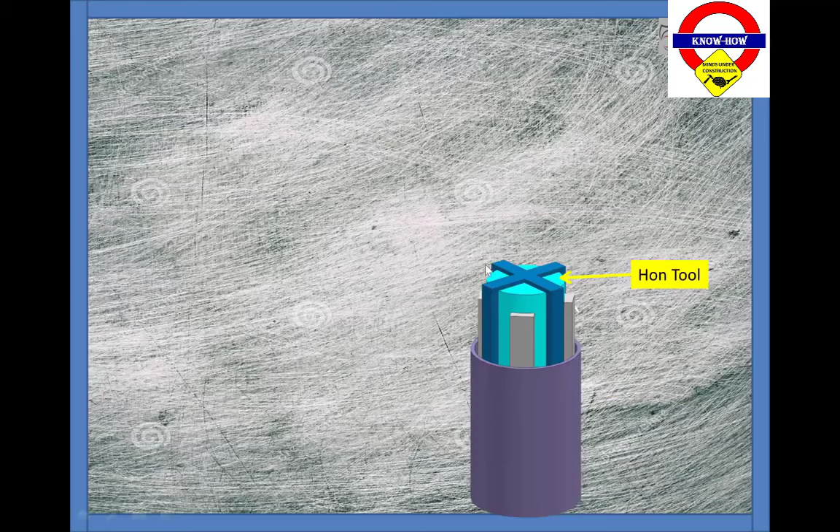Before we see the actual process, we should get an idea about the components required in the honing process. First, the honing tool. This complete assembly is called the honing tool, which contains the hones or honing stones and the guides. Now we'll see what is meant by the hones or honing stones.

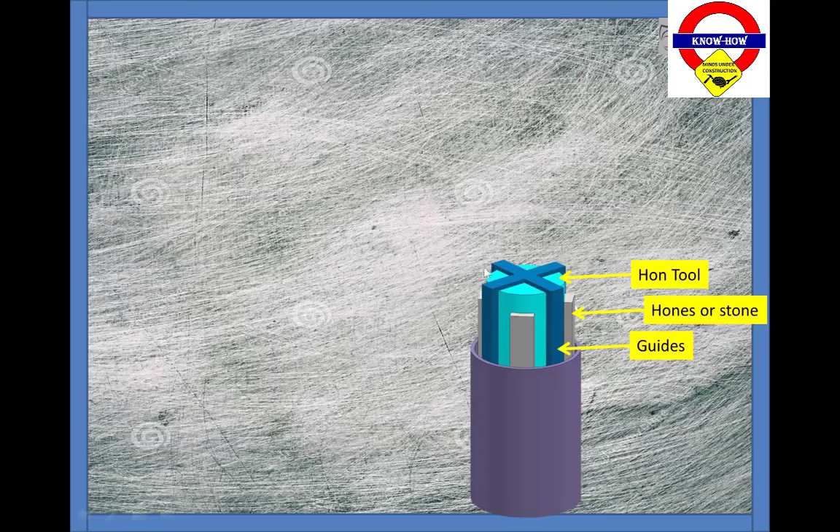One more thing before that - this is just one type of tool I have shown. Mostly this type of tool is only available in the books, but nowadays in the market plenty of different types of tools are available. If you want to see different types of tools available in the market, just visit any e-commerce site like Alibaba or eBay. You will get plenty of different types of tools, and then you will get an idea about the honing process also.

So now we'll discuss the hones or honing stones. Usually honing stones are made up of common abrasive and bonding material, like in a grinding wheel. Because of the bonded abrasive, this process is similar to the grinding operation. That's why it can remove as much as 3 mm of stock, but normally it is limited to 0.5 mm only, because we are going to use this process to finish round holes only.

Just now I said this process is similar to grinding, but there is much difference between grinding and honing. The first difference is that in grinding the wheel follows a simple path - for example, in plunge grinding a shaft, the wheel moves towards the axis of the part and then moves back out. If there is any inaccuracy in the grinding wheel itself, it has to get replicated or transferred to the part being machined. That means the accuracy of the part depends on how accurate your grinding wheel is.

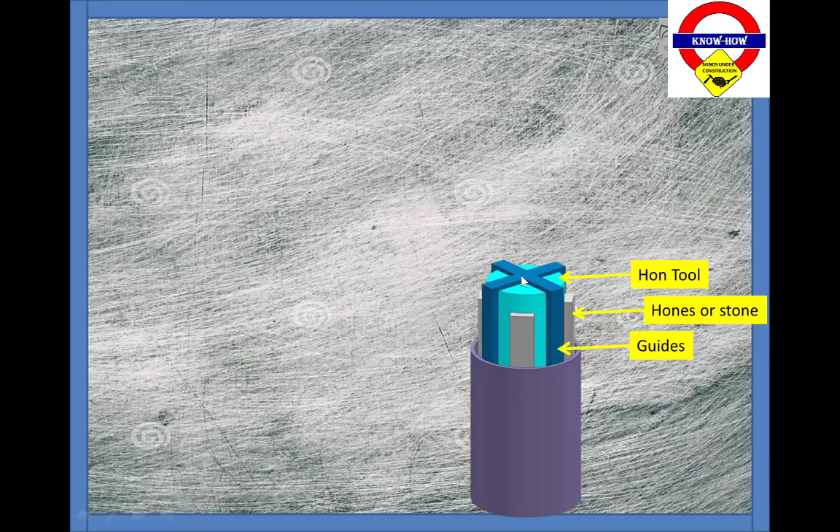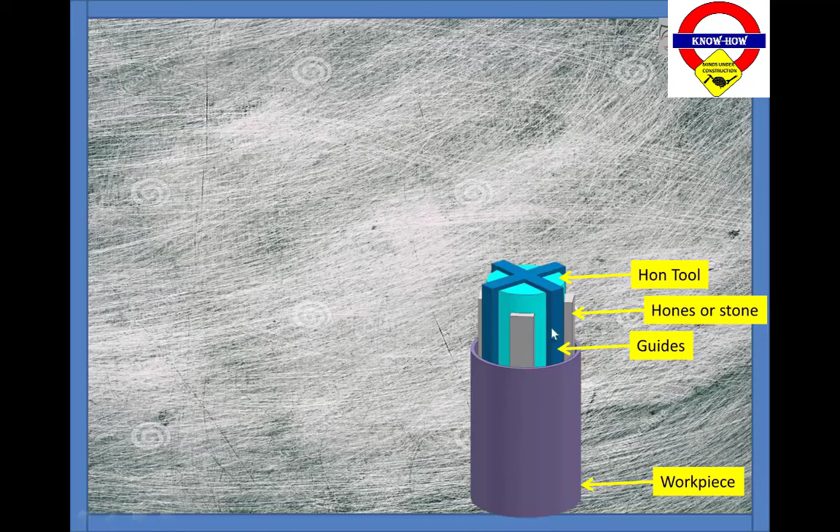The next component is the workpiece. The workpiece shown here is a cylinder - you can consider this as a cylinder block of an internal combustion engine, and we are going to finish that. So from this explanation you can define honing in one sentence: honing is a grinding or abrading process mostly used for finishing round holes. This is the one-sentence definition of the process.

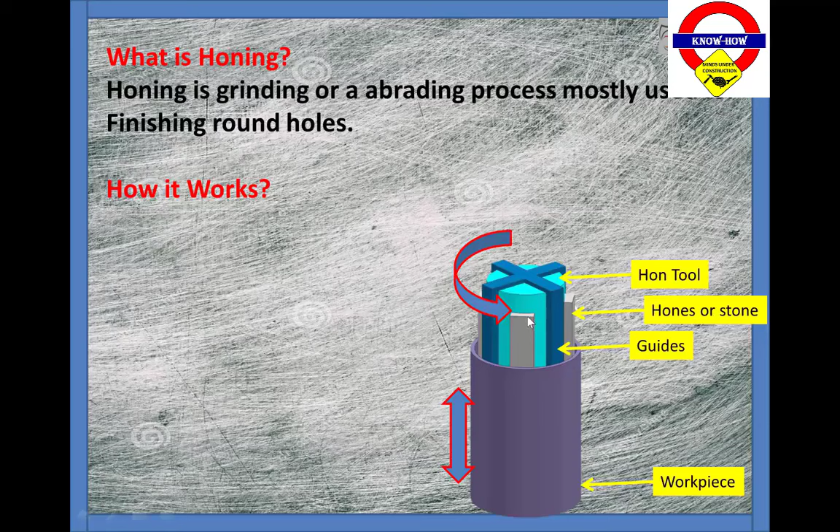Then, how does it work? This means what motions are given during honing. In this video, I have shown the same tool model to help you understand the concept of honing. From this you may understand that in honing you can give any direction to your tool or workpiece - that means you can give a back and forth motion to the workpiece, or rotation motion to the tool or workpiece, anything. But when performing honing manually, the tool is rotated.

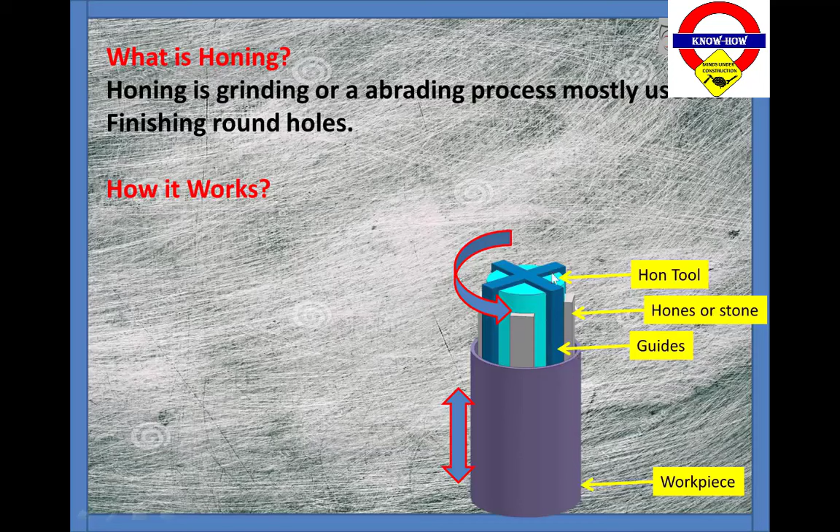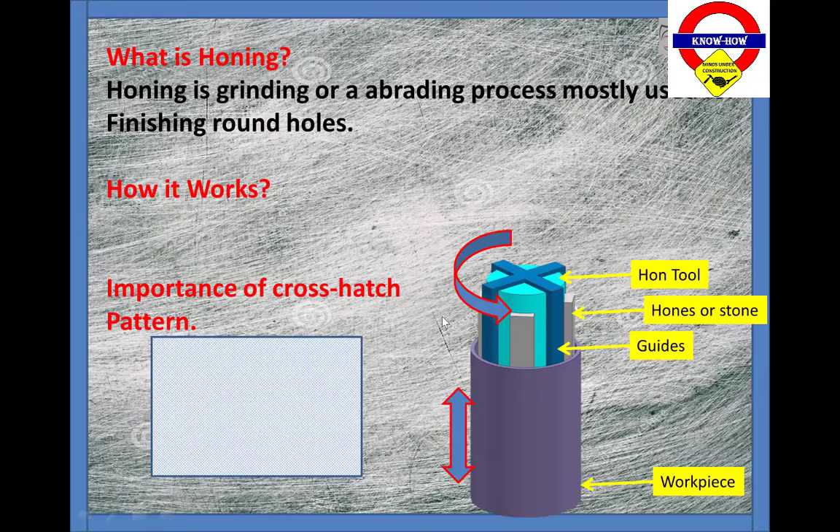That's why I mentioned rotating tool with back and forth motion given to the workpiece. One more point, if you want precise honing, then while rotating the tool it should have slow back and forth motion so that we generate the cross hatch pattern on the workpiece. The importance of that cross hatch pattern on the mating or sliding surface is that it can hold the lubricating oil, giving smooth motion and avoiding wear and tear, so ultimately the life of the component increases.

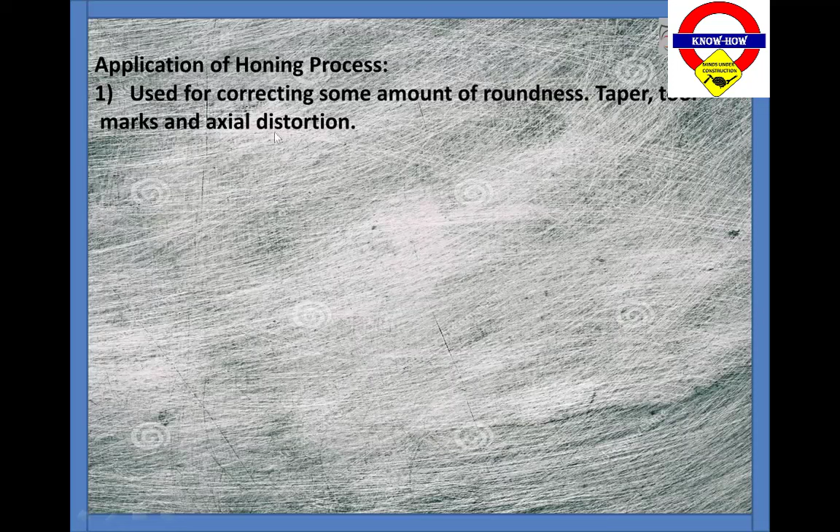Next, what are the applications of honing process? As I said, we use this process to finish round holes - finishing in the sense correcting roundness, taper, tool marks or any axial distortion. I hope you understand the concept of roundness and axial distortion here; if not, please Google it.

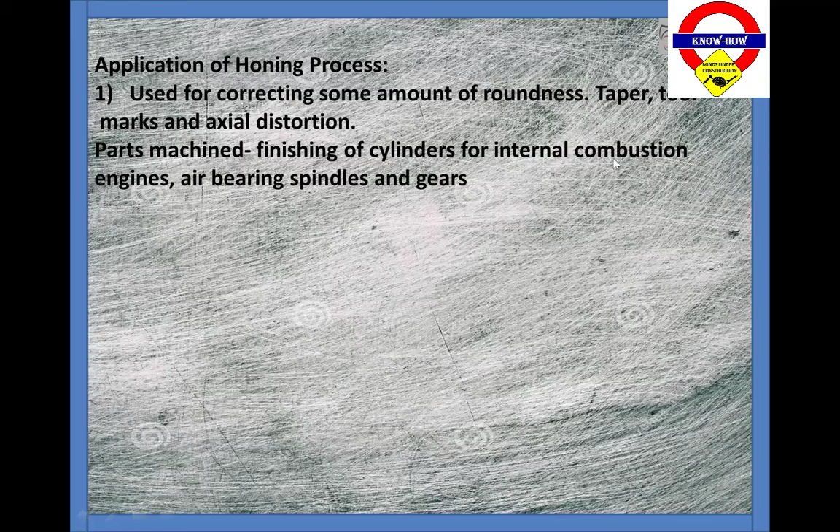What are the common parts machined by honing process? You can see cylinders for internal combustion engines, air bearing spindles and gears. These are the common examples of honing process.

Next, materials to be honed. First question that comes to mind - is there any limitation on materials to be honed? No, absolutely not. You can machine a very soft material to a very hard material like plastic, silver, aluminum, brass, cast iron, hard steel or cemented carbide also.

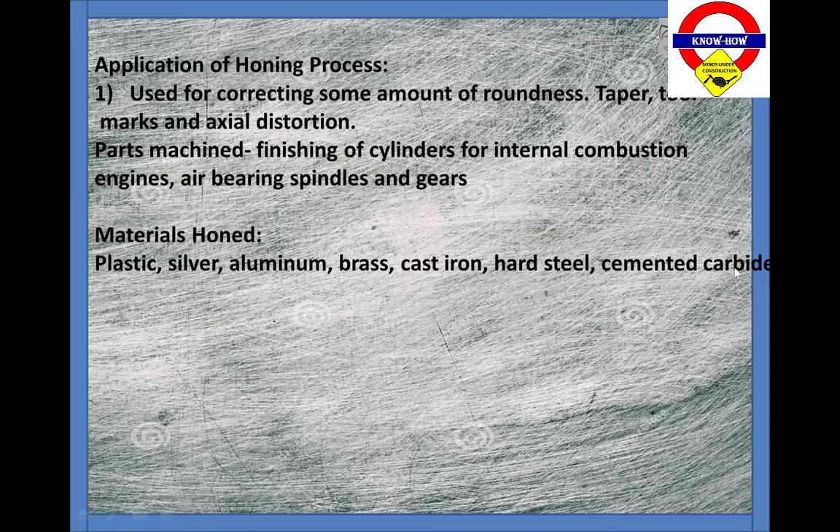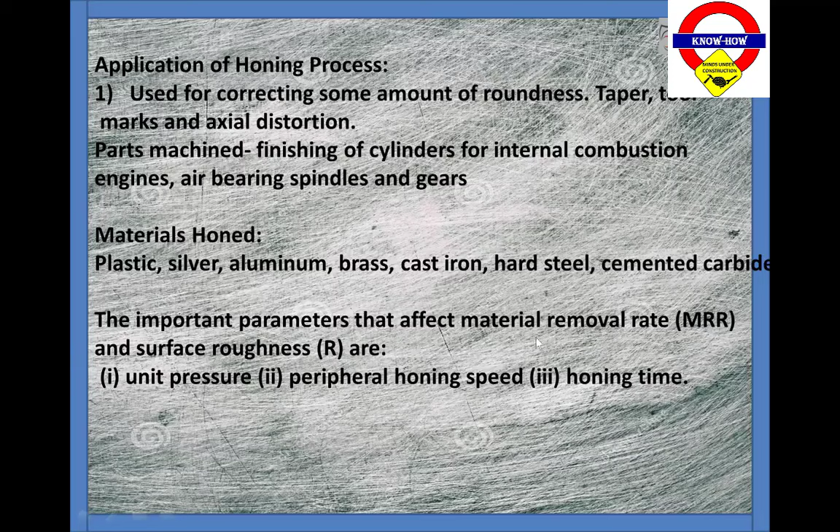Next question - what are the important parameters that affect the material removal rate and surface roughness? As I told, we are pushing the hone stones outward radially. That means the first important process parameter is unit pressure. Then honing speed, that is surface speed or peripheral honing speed. Third is the honing time, how long you perform it. On all these three parameters depends your material removal rate and the surface roughness produced on the part.

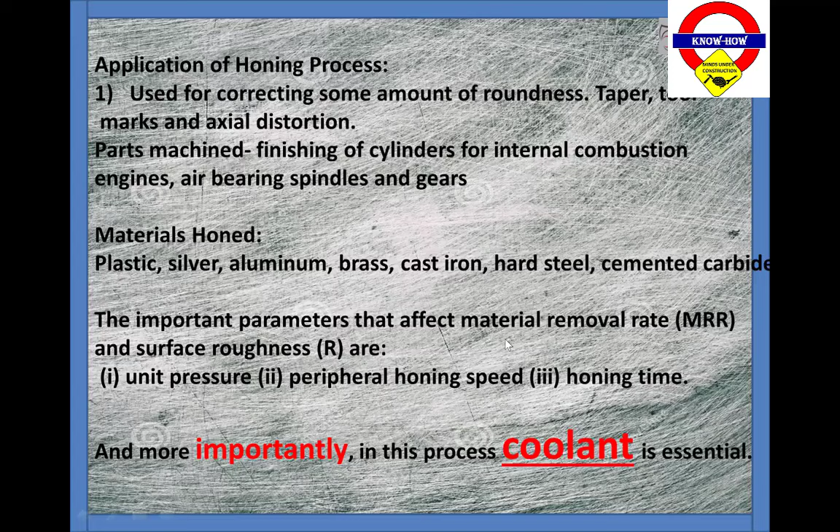More importantly, in this process coolant is required. Why so? As I told you, this process is like a grinding process, a type of grinding process only. So it generates heat and burrs. To remove that generated heat and burrs, we need to provide coolant in the machining zone. This is the most essential point in the honing process.

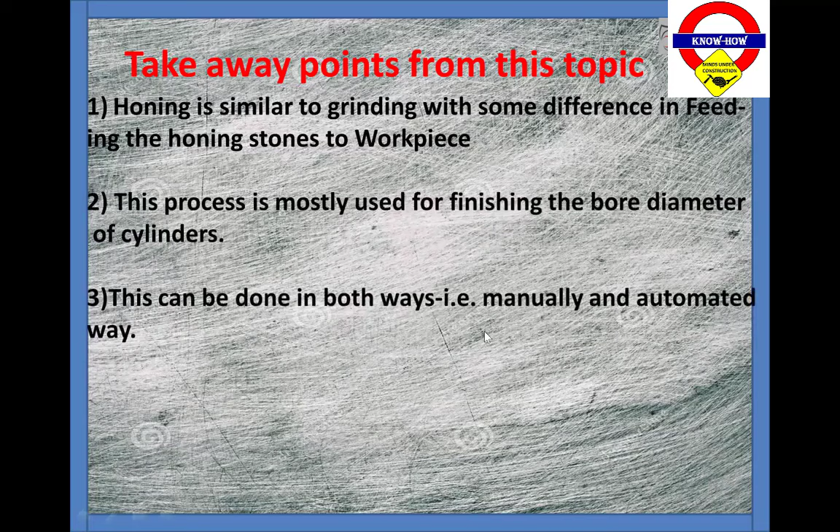That's it guys from this topic. These are some points I have summarized here. You can note it down so you will not forget the honing process. I will read it for you one more time. Takeaway points: first, honing is similar to grinding with some difference in feeding the honing stones to the workpiece.

Second, this process is mostly used for finishing the bore diameter of cylinders - finishing in the sense of all those points just discussed. Third, this can be done in both ways, manually and automated, depending upon the requirement or the setup you have.